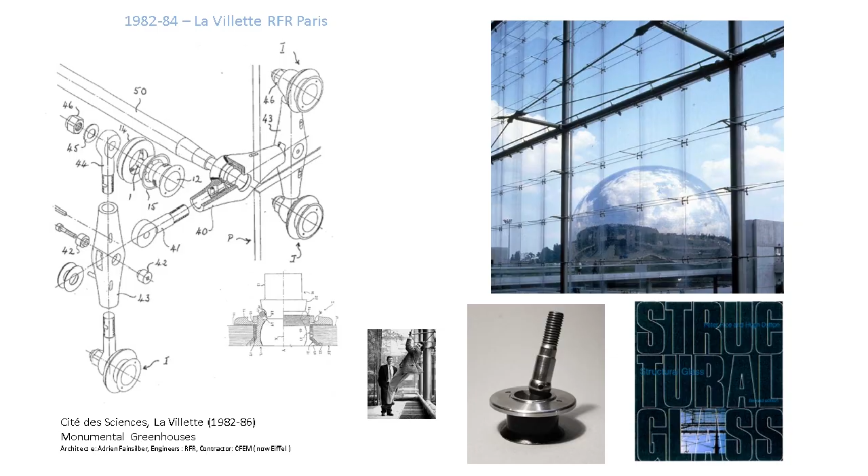There was Henry Bardsley, also an engineer. Peter used to call me the optimist, Henry the pessimist. He'd bounce questions off me and off him, and it was a very fruitful time. We ended up redefining the use of glass in facades using structural glass, and Peter gave me the honor of writing the book Structural Glass with him. You can see these images of the patents that we took out as RFR for developing this new suspended structural glass.

For me, my role was drawing, and drawing is really, really important. For me, it's the whole process. It's been part of my career and my life throughout - drawing that's so important.

I did these drawings of the pieces from La Villette by hand at the time. We didn't have computers, we didn't have AutoCAD to draw them for us or to correct them. If you made a mistake, you had to start again. This drawing, I think I did maybe 5 or 6 times.

But it was interesting - the context for La Villette was exactly as Peter had intended, a real laboratory of a mixture of professions. We consulted people, with Martin Francis and Ian Ritchie's incentive to go and visit Le Bourget Air Show, to visit glass factories, to visit boat manufacturers who made cables.

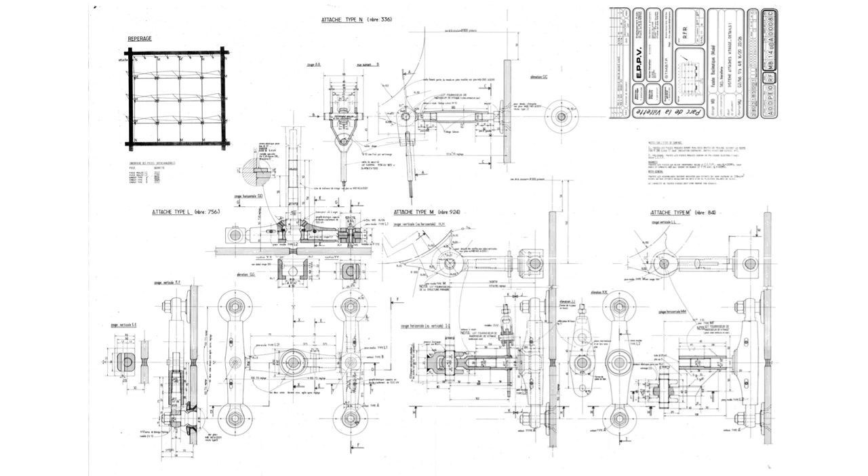And so I was sort of brought up in this technology of boat bits, which reminded me of my own background of sailing in Jamaica at the time with my father. So I felt very close to it. And I was learning - I was very, very, very lucky.

After La Villette, I went through a period where I spent a year sort of traveling between London and Paris. I had a French girlfriend at the time, which is why I ended up staying here. But I used to share my time between Paris and London, and it allowed me to work.

I went to work with Foster on the Stansted Airport, and I did a lot of the details of the tree structure, a lot of work on the facades, as well as reconnecting with Zaha Hadid and Bernard Tschumi, who were teachers at the AA when I was there.

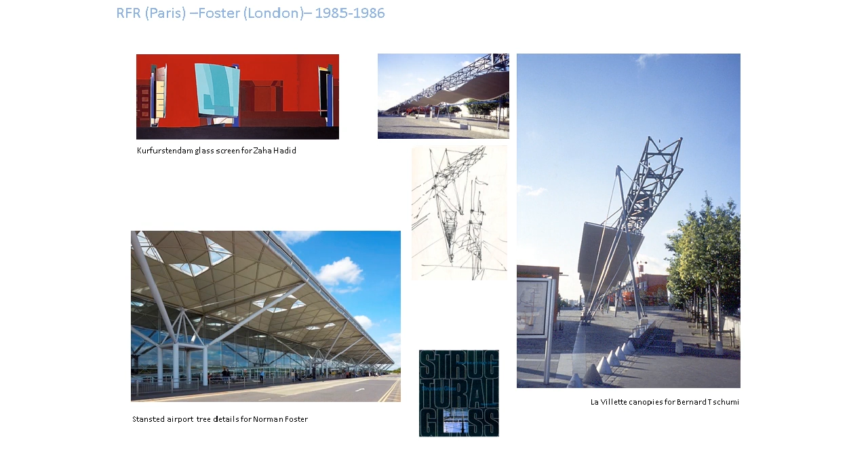We did a competition, the Kurfürstendamm competition, with Zaha, who also sadly, as you know, passed away not so long ago. And with Bernard, I ended up working quite a lot on his galleries for the La Villette Park. So this was flitting back and forth.

And then I decided to get married to my girlfriend, so I decided to come back to Paris and work with Peter. It was during that year in London, actually, that Peter's office was at Fitzroy Square.

I was working at Foster's, and in the evenings we'd just go and chat and talk about the book that he wanted me to write with him on structural glass, but also just on what we could do in architecture, what our approach would be as designers, mixing architecture, mixing structure, and designing holistic pieces.

So he invited me to come back, and the first projects we were doing were the nuages, as they call them - the cloud structure in the Tête Défense. But then following that, the pyramids.

I won't go through all of the work we did at RFR at the time, but it's quite remarkable work, I'm sure many of you know it. But again, it's exactly that - it was value-added pieces for designs where there's a fusion of architecture and engineering.

The inverted pyramid by Pei at the Louvre was one of the key pieces, and I think one of the most remarkable pieces of how natural light transforms this underground space. It's absolutely a brilliant piece of work, and I've always admired it.

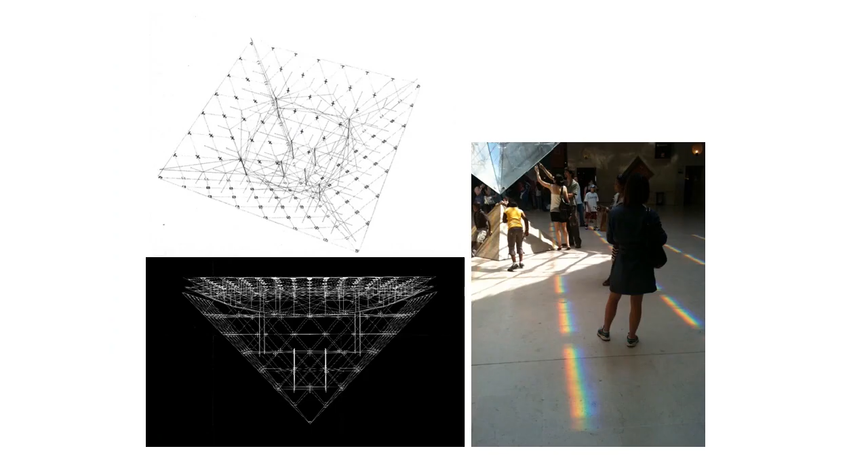The way the sloping glass reflects the sky down into the corridors on either side - the assemblies are very minimal. This was a project that Peter himself was very, very much involved with. If there's one of the projects I really think was entirely Peter, and Peter's thinking, it was this one.

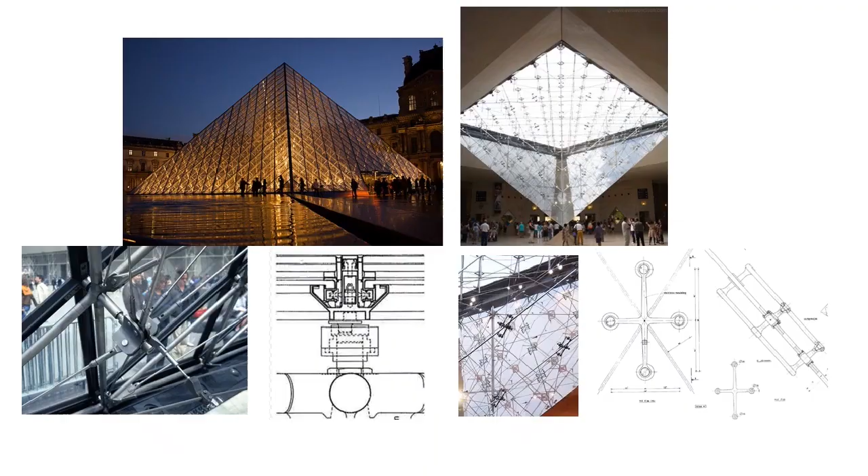So many times he sketched this idea of the tensegrity, making a tensegrity sort of net of cables that suspended the perfect planes of the four sides of glass that are hung down. There's no structure except for this tensegrity mesh that maintains the plane of glass in its inner surface.

I've found this, and I use this example often with students. The difference, if you look closely, between the right-way-up pyramid, the Grand Pyramid, and the inverted pyramid - it shows two very different approaches to design and engineering, which for me reflect quite well the approach that Peter Rice had and that we were taught at RFR.

So the Grand Pyramid is a layered design. It's quite clear - there's a steel structure, the tubes, with the bracing that stabilizes it. That was the engineer's job - that was Nicolet from Montreal who did the engineering. And then Pei had his team in New York do the facade design.

I think his name was Mike Flynn. I'm not entirely sure, but they brought in the most advanced system of glazing at the time, structural glazing. This was right at the beginning when glass was bonded to an aluminium structure.

You have the tube, about 40 or 60 millimeters in diameter, I forget. You have some adjustment patches because the structure has to adjust to make sure that when the glazing comes on, it fits. Two distinct disciplines, two distinct responsibilities, which creates a global design where, in fact, the glazing system ends up being bigger than the tube itself.

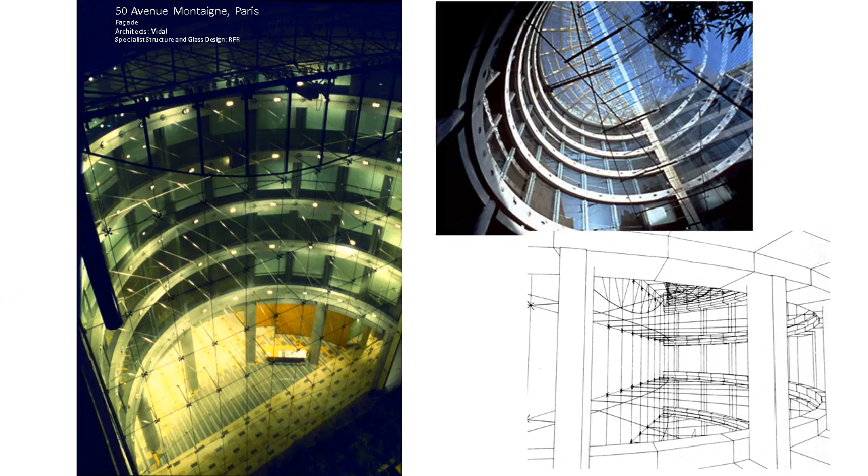So it's a good example for me of the difference of this approach to holistic design that Peter taught me. And then since that, at RFR, we carried on doing this work using structural glass.

This facade, and I can say it's quite remarkable today - it's 24 meters high, 16 meters wide, one curtain of suspended glass, each pane suspended from above, braced only with cables. I'm showing it today because it's very, very sad.

This building, this facade, was pulled down recently by French architects to redo the 50 Avenue Montaigne, and nothing was saved. We tried to get it listed or retained with the client representative at the time. We tried to get people interested, but sadly, the only memory we have of this project is these pictures, and it's very, very sad.

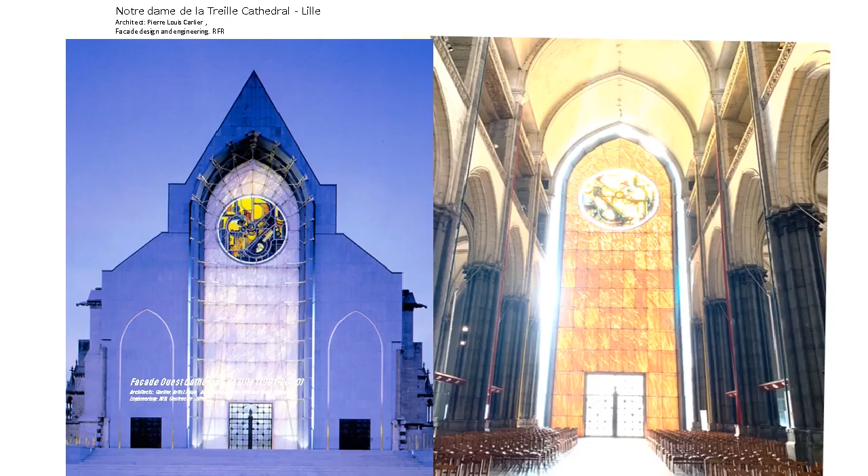The last project I worked on with Peter was the cathedral in Lille. When Peter fell ill in '91, he decided to stay in London and work from there.

I would travel over, along with other team members of RFR, to work with Peter at his home. This was a project that really got his attention and full interest, as he was also writing his book, An Engineer Imagines, at the same time. It was a very spiritual project for him - it allowed him to get closer to the church, and again, it was another remarkable opportunity for me.

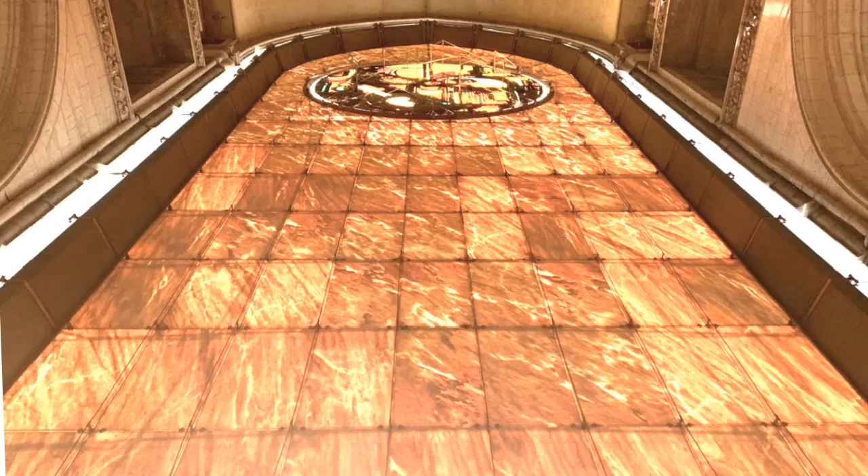The idea was to create, in an existing cathedral, this window in suspended stone, fitted into the end of the cathedral.

So now in Paris, after RFR and after Peter's untimely death, I decided to start my own practice in Paris, in Rue Pecquay. This is a picture of our studio - it's right next to the Pompidou Center, which is quite significant for me, in the heart of Paris.

We're very lucky to have a skylight, and there are 15 of us - keen, creative, inquisitive engineers and architects, a lot of students, very young people, and a very motivated team. We're working on projects in Paris, but very largely a lot in China, a lot in Hong Kong.

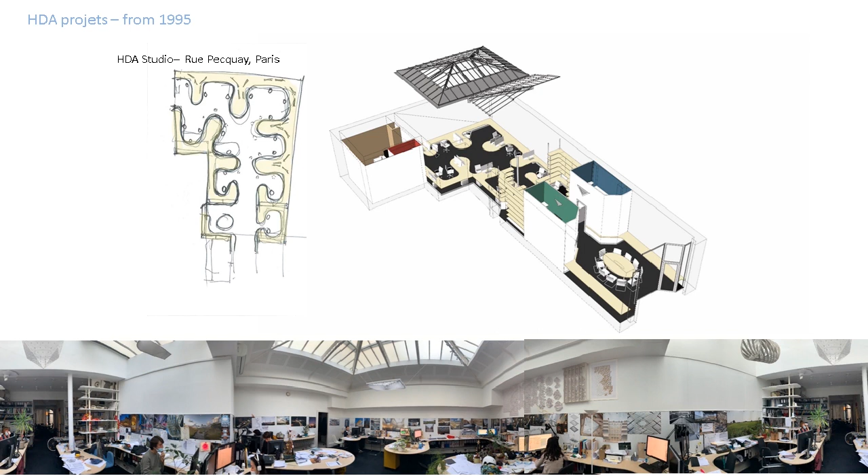I'll just go through, not to keep you too late - I'll show you a couple of our projects done here at HDA in Paris. I worked a lot with Bernard Tschumi. We shared the space at the beginning with him, and one of the projects he asked me to work on with him was another way of looking at glass.

It was for the Acropolis Museum in Athens, where the museum that Bernard won the competition for was to house the Elgin Marbles. The Greeks, Bernard, and myself felt that they should be in Athens.

The idea was that the museum, the Parthenon Gallery, is exactly the same proportion as the Parthenon itself, raised up and elevated on top of the museum, so it gets full protection and you get the view of Athens. You can be in Athens with the same orientation, the same light, so symbolically it's quite a strong idea.

So here we use glass very minimally. I used two skins of glass to create a sort of thermal chimney, because it's not only a very rich cultural context, but the climatic context of the heat of Athens was a real issue.

How do you create a glass box in Athens? We created a double skin with a chimney effect between the two skins, but only for the upper pieces of glass. The lower piece of glass was just a single piece with no framing, at eye level height, so you could get a clear view of Athens, and the hot air goes up. And I have to say, it does work. So it's a facade design looking to nature, looking to understand the climate and particularities of the climate of Athens.

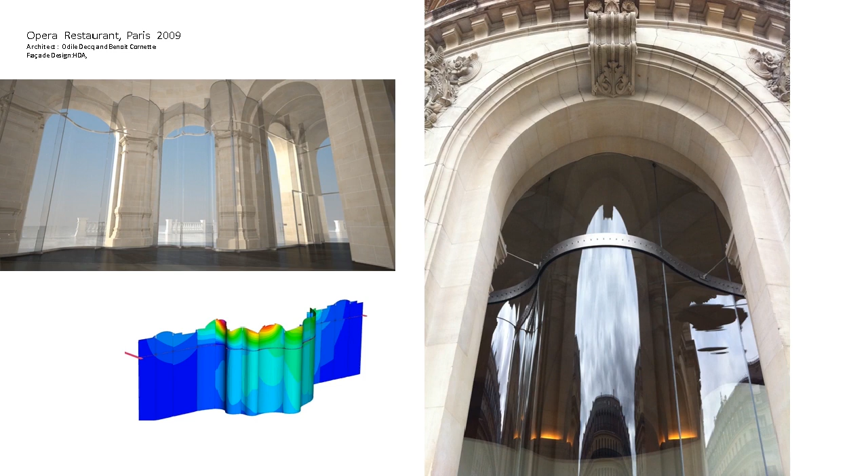Another one with Odile Decq here in Paris. We helped her do this very small restaurant in the Opera building, using curved glass this time. So instead of using mullions, we curved the glass. This process is used quite a lot. This is one of the very early ones where, just by using finite modeling, we can simulate the structural performance of the glass without mullions. So you get a mullion-free rippled glass where the ripples follow the forms of the arches of the initial Garnier portico.

And then some bridges. Peter loved doing bridges. He kept saying to me, 'I'd really like to do more footbridges,' because footbridges are something where you can't hide the structure. The structure is obliged to be part of the architecture. You're designing the architecture with structural components, so every piece has to function as well as be part of an aesthetic composition.

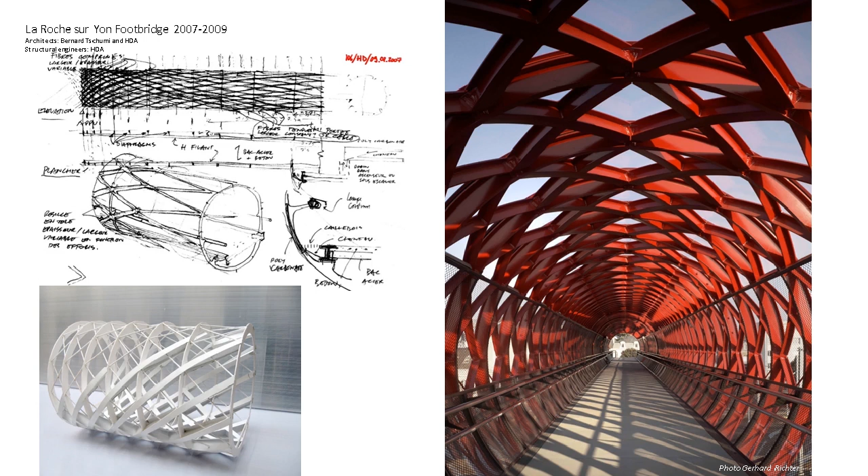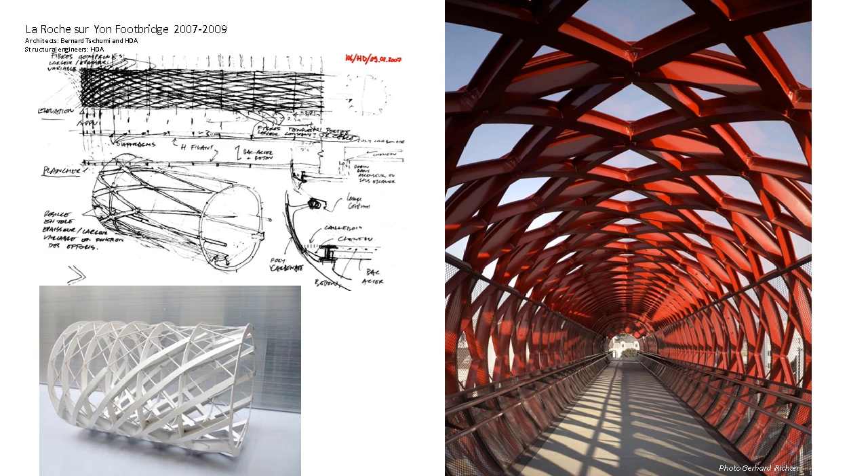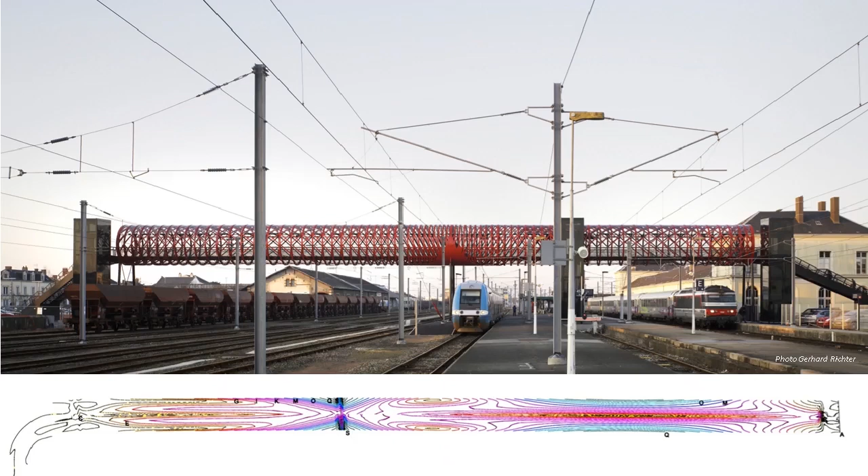Another one with Bernard Tschumi again, in La Roche-sur-Yon, a railway bridge over the railway tracks of the SNCF. The line was upgraded to take TGV trains, and the bridge over the railways has to have a mesh, or covered protective panels, to stop people throwing things on the tracks and to make sure the safety of people and trains is maintained. So we decided to do the bridge as a mesh itself, enjoying the idea of looking at how a mesh is working structurally.

So we designed a tube, looked at how the forces would go in it, and then adapted the shape of the structure to follow the forces within it. It's just a simple tube for a simple railway track in a small town in France. We're just enjoying the structure, the structural forces—the design, the way it goes together, is expressed in the design and becomes an interest in itself.

Another project we've completed fairly recently is in the Louvre itself again. I was very honored to come back and work in the Louvre after working on the pyramids, particularly the upside-down pyramid. Peter Rice also helped on the Cour des Finances, the skylights, Marly, and the other courtyards, which he worked on with Ian Ritchie. This final courtyard is the last piece of the Louvre.

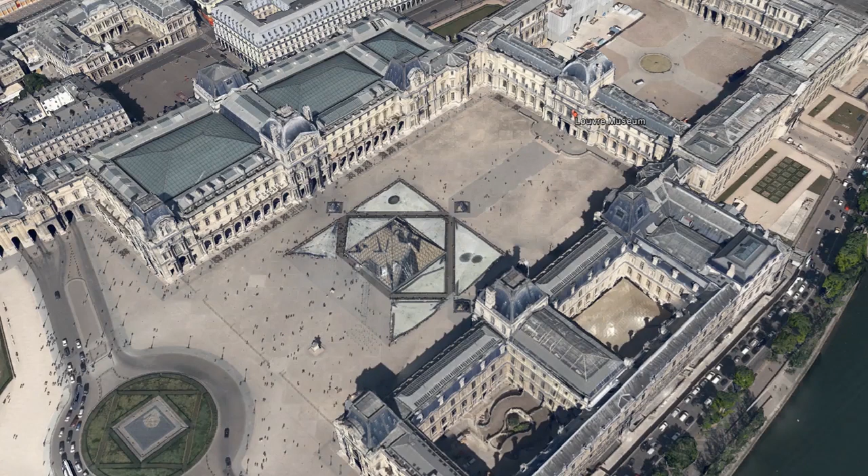I was asked by architects Rudy Ricciotti and Mario Bellini to help them on the technical design of the Arts de l'Islam department exhibition space. It's the last part of the Louvre to be converted in the Grand Louvre project. Rudy and Mario's idea was to have a very minimal wavy surface, evocative of sand dunes or a flying carpet—bold and very modern inside the Louvre, yet very appropriate.

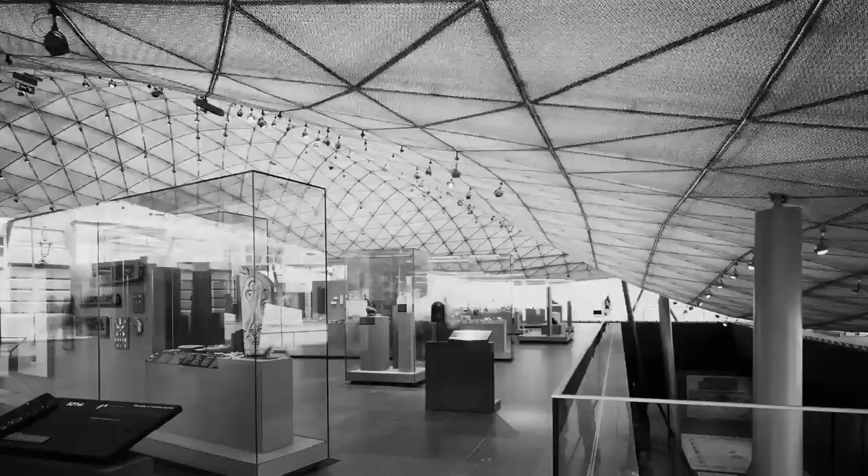And for the scale of it, we decided not to have visible glass, but we obviously wanted the light, so the covering over the Louvre is made of meshes which filter the light. These are some views inside—some beautiful photographs by Erieta Attali show the idea of the soft light.

Here we wanted the structure to play a very minimal role; it's much more about just filtering light. This concept sketch I did shows how we contributed to the design with Rudy and Mario by making the wave look very thin on the edge, so the structure tapers to a point, but it's deep only where you need it, where the maximum bending moments are. So here, integrating the structural thinking into the architectural design, trying to get the feeling of a thin carpet flying, but using an optimum amount of steel and getting the impression of lightness.

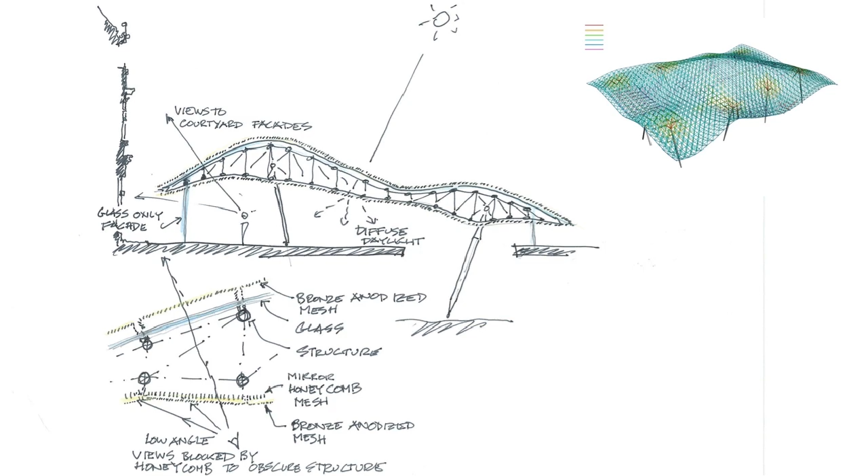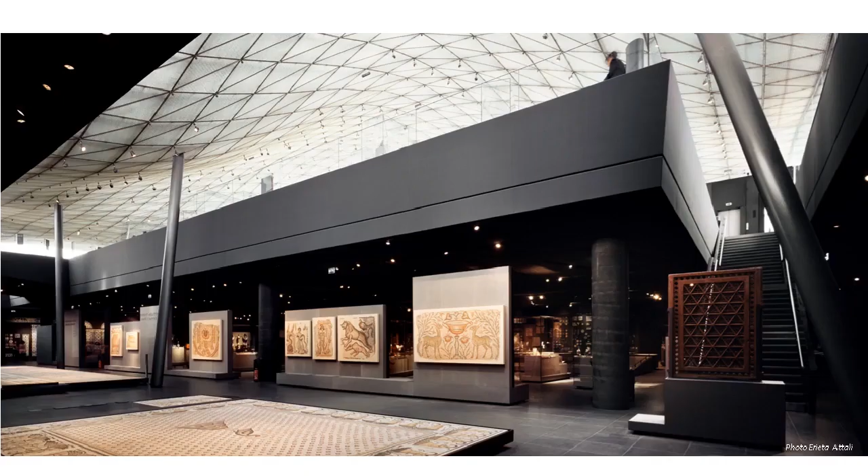So, and here's some other pictures. This shows the mesh on the top that we use to hide the glass, to filter the daylight, to limit the amount of direct sun. Obviously, you cannot have direct sun on works of art, but we still want to have the light to be able to see the artwork. There's the cleaning process, and then some other views inside.

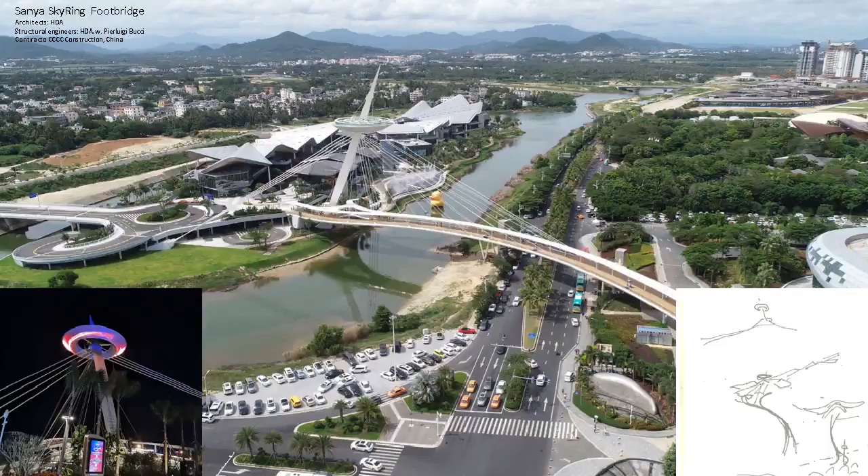And we played with this idea of inclining the columns. We could have done them straight, but we suggested to Rudy that, hey, it'd be more fun if they were inclined, like the poles in the Bedouin tent. And it also reinforces the idea of the roof floating and being a lightweight object.

Then another footbridge that I've just completed in Sanya in China. This one I worked on with a friend engineer, Pierluigi Bucci, and a Chinese construction company, the same company that built the bridge between Macau and Zhuhai and Hong Kong. Massive company. And the client just said, we just got to build this bridge.

So it happened in an incredibly short period of time. In 1 year, the whole thing was completed, but very well. And we've all been taught to be cautious about some of the designs in China, but this one, I have to say, was just remarkable. The quality of the construction is quite remarkable.

It's a sky ring. Sanya is the southernmost part of China. There's a long beach and lots of hotels, but there's two shopping developments, one on the island and another one just to the right. And the bridge was to create an iconic connection between these two shopping retail developments.

And we won the competition with the idea of creating a sky ring where people could go up on a lift to this platform. I was obviously inspired by the project in Brighton, that remarkable disc that's up there, and I think that here you can get a view of the sea from the top.

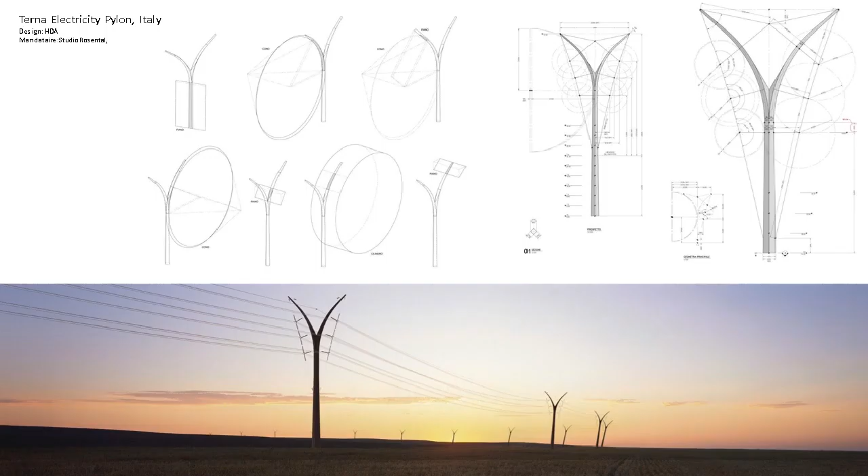The pylons dominate the landscape. I used to call them industrial soldiers marching across the landscape. They're insensitive. They're very practical. They're very functional. They're very economical. But they are hated, and people don't like the electricity pylons. So in the two competitions we did, the attempt was to try and improve the impact of the electricity pylons, the transport of electricity in the landscape.

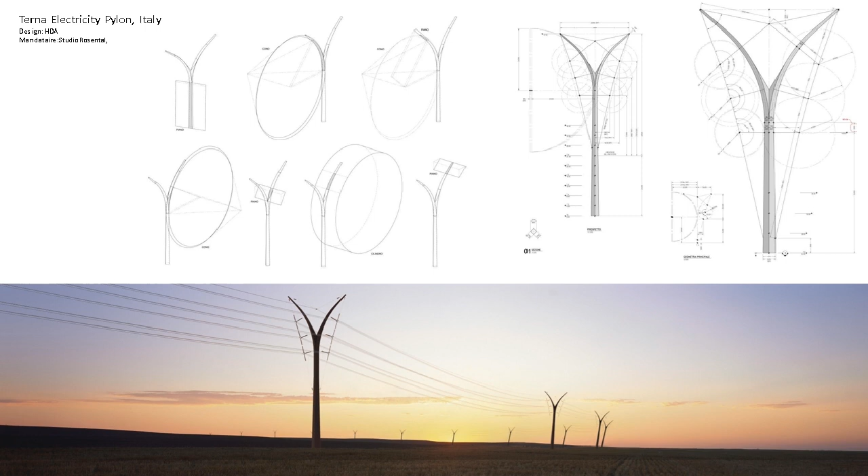This is the Terna competition in Italy that we won. We literally just took a sort of leaf-shaped pylon, changing the shape of the pylon. We were very naive, not knowing how the pylons were suspended and how the cables worked. We just thought it'd be nice to use the idea of tensegrity and fix the cables to a network of other cables, so that the only image you saw in silhouette was this very delicate leaf-shaped object. And I was happy to say we won it.

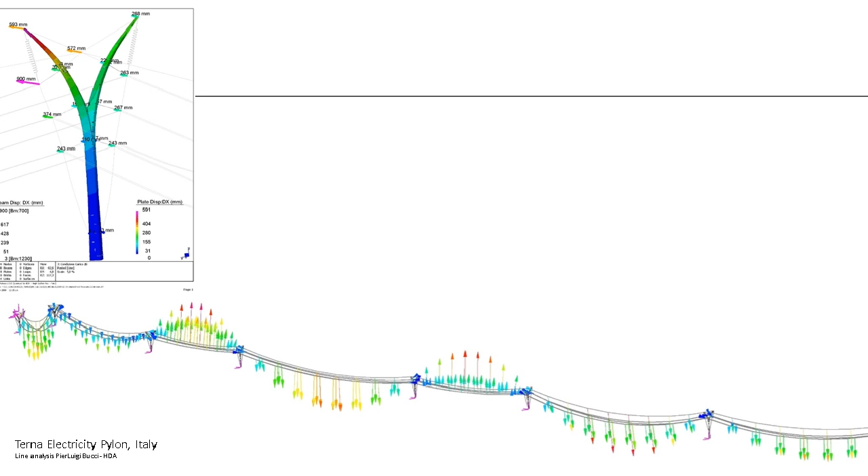And the same friend, engineer Pierluigi Bucci, attacked the project by building a computer model of the whole line, including the pylons and the cables, looking at them in different cases. But when we went to talk to Terna, they said, no, we have a table of where the suspension pylons are that take the gravity loads, and where the tension pylons are that also take the tension loads. But this approach was completely foreign to them.

We won the competition. We tested it. We broke the rig, not the pylon, when we did the testing, and so it was successful. And there's a line somewhere between Milan and Rome on the highway. You can see our pylons. They are here in the background.

The idea was also, in Italy, you get this beautiful light, and the triangular sections of the profiles pick up the light beautifully. So there was the symbolism in the design, sort of reminding ourselves of nature, and how the design can be inspired by nature.

Then we got invited to do a second competition after the one in Italy, for a line for RTE between Lille and Valenciennes. This is the landscape there. It's very flat, punctuated by church steeples. And so we had a different approach in this project. The client wanted a specific line, not something generic that you could use everywhere, just for one line, one design. And so with our experience from Terna, we tried to think about how the lines could work.

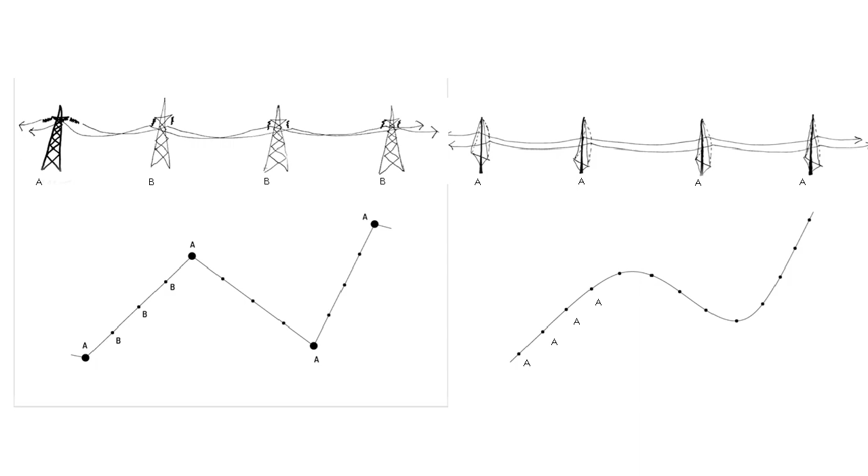But in fact, with the process of the selection, RTE were very bold in their approach. The competition was not decided by RTE. It was decided by a local group, a participative consultation with all of the local interest groups in the area between Lille and Valenciennes. So we had to go and present the design in a sort of town hall in the middle of the place where the line was going to go through, and present it to the farmers committee, the hunters, the local residents, and it was very, very argumentative.

Obviously, as nice as you want to make the pylon, people still had a really hard time accepting this idea of having the pylons. But it was a very interesting process, and it was for me very revealing, because it meant sharing the idea that we can make things better if we design them carefully.

So we put a lot of attention into the little maintenance platforms, how they reflect the light, how all the connections were made to be as minimal as possible, and just the idea of a pylon: it's a very tall pylon, it's very bold, and it's proud to be tall. We're not trying to pretend it's not there. It's there. We need electricity. We just want to design them and try and make them beautiful objects to make them more acceptable.

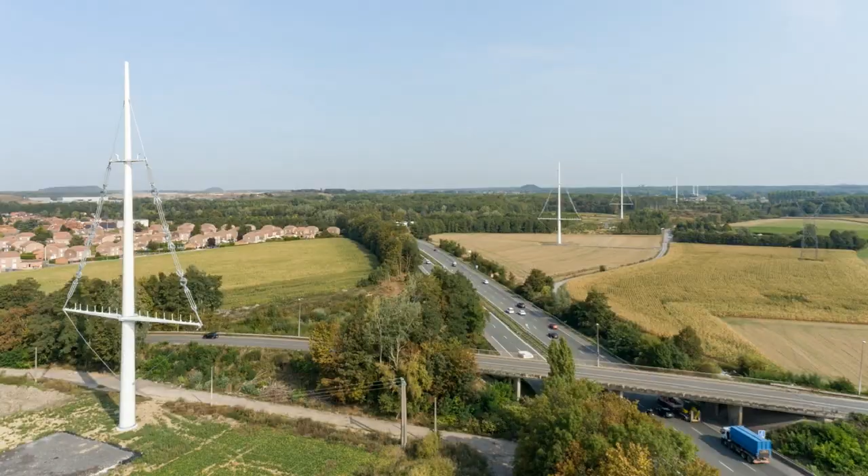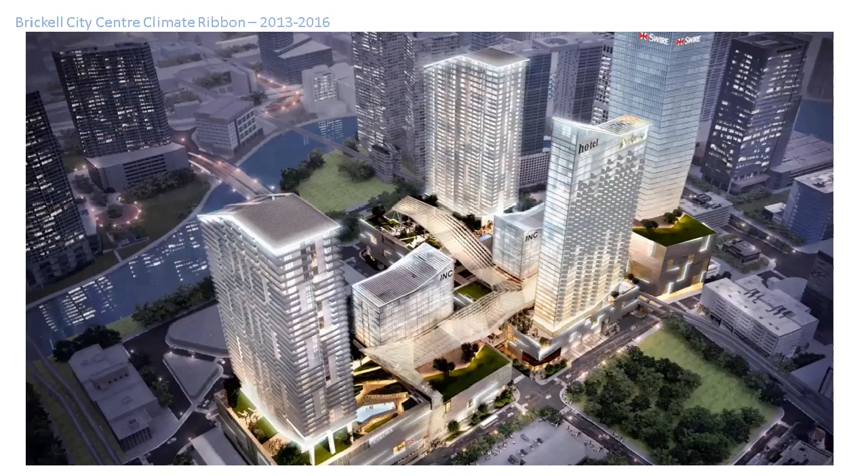So, changing subject slightly. This next project I wanted to talk to you about in designing with nature is in Miami. It happens that for about 15, 20 years I've been working with Swire Properties in Hong Kong. I've developed a very good working relationship with Swire.

I've done many projects with them in Hong Kong and mainland China, curiously in a similar way to the conversations we'd had with Peter about us doing parts of the building, doing just the pyramid in the Louvre, or just the greenhouses at La Villette, doing pieces of buildings, but doing them as part sculpture, part architecture, part key value-added piece.

And we'd have conversations with the chairman, Keith Kerr of Swire at the time. He was going to build this big tower in Hong Kong, and I said, well, spend all the money on the lobby. People come to the lobby, they see the lobby, that's where they touch it, and you can be more economical with the facade. It's the same conversations I'd had with Peter, but here it was with the developer, and this culture, this idea went, and I've done about 10 projects with Swire doing a similar thing.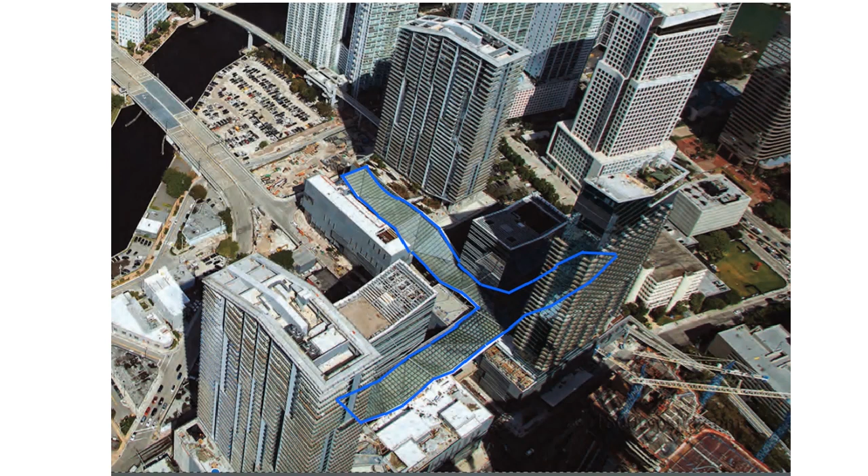So they couldn't air condition it. They couldn't close in the volumes over the streets anyway. So they decided to say, okay, we're going to make an open street in Miami, but what we need to do is to make it a sort of pedestrian street that's comfortable. So Steve Owens, the president of Swire in Miami, asked me to do the climate ribbon. And this brought me home.

These are some fun pictures of my childhood. Peter mentioned I grew up in Jamaica. There's me, age 8, and there's me again in the same place 40 plus years later, 50 odd years later. I grew up in this house with breezes; the houses are built on top of the hills in Jamaica. Catch the breeze, shade. It's all about shade and breeze. So this is what design was about. This is what making life comfortable in Jamaica was about.

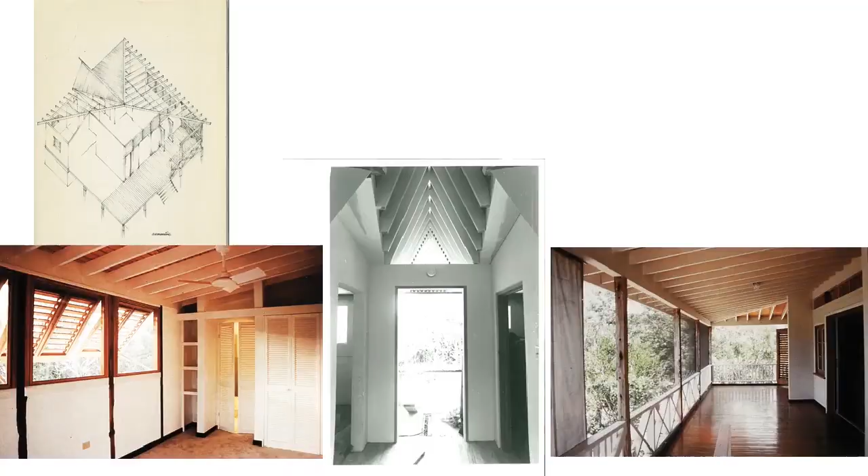And I went back to the house a few years ago, and it's gone. Nature's taken over. So nature's won that battle. But it was very much a part of me. So coming back to this context was very strong for me. This was my first house I did as a student, using wood, and there was no glass. Interesting, I ended up being kind of known for using a bit of glass. But all the windows were just louvres, wattle and daub, mosquito screen, naturally ventilated, no air conditioning.

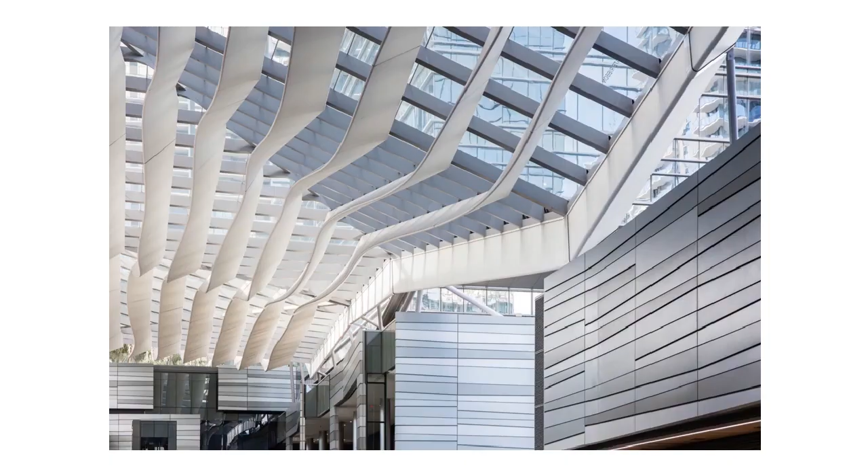So doing the project in Miami was a similar thing, obviously on a different scale, but with the benefit of the engineering and the technology that we have today. And I think it's quite interesting to take those simple intents of using nature's forces and bonding them together with the technology as a way forward. For me, this project in Miami is very symbolic and a very powerful statement about what we can do as designers, putting together common sense, attention to nature, to her forces, to her forms, with what we know about engineering and computers and the technologies we have today.

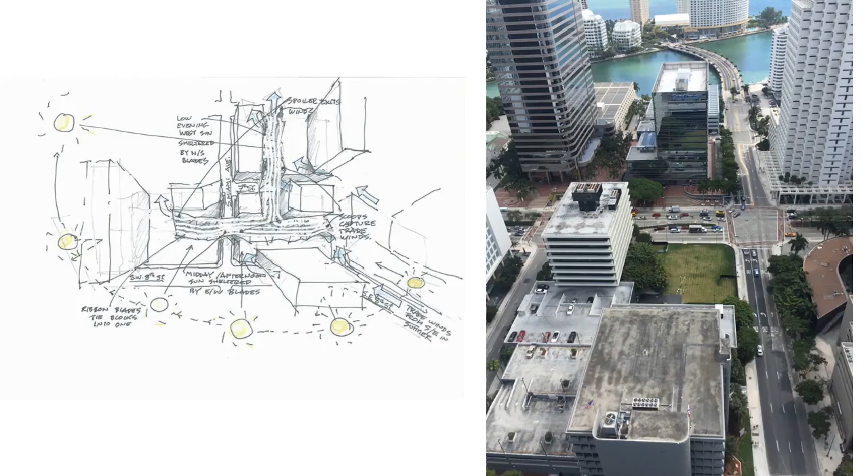This project, we did parametric modeling in the studio. For the sun, all of the blades, their shapes are determined exactly by the orientation of the sun. We wanted to have views of the buildings and of the Miami sky, and maximum daylight, but indirect. All these blades are designed in function of the buildings in the context of the development. They're all inclined very slightly to optimize getting shade only, and then views where we can see through. And then the other thing we did was to capture the breeze.

So this sketch here shows the development. We have this street, Southwest 8th Street, which goes down to the sea. Thanks to my youth in the Caribbean, I know that you have a trade wind from the southeast all the time, particularly in the hot seasons. So you get the breeze coming up Southwest 8th Street. We wanted to capture this breeze and funnel it through the whole development, but at the same time shade it from the sun. So the east-west blades on this portion protect from the sun from the south.

The hotel here protects this band from direct sun in the midday, but the blades, if they're running north-south, protect from the westerly sun. So this idea, a bit of common sense, and then mixing that with the science, we did these desktop simulations of how the wind would behave. We talked with RWDI, and RWDI confirmed the hypothesis we'd had, and advised us that we need scoops to catch the breeze, and spoilers to help it out.

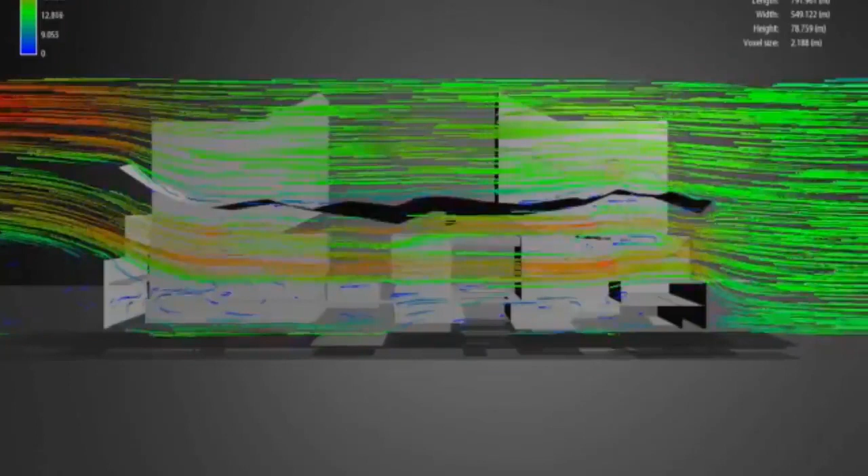As this diagram shows, you could see at the tail end of the breeze where it's red, that's a spoiler which lifts it up, creates a negative pressure, drawing the air through and making sure that you get nice breeze flow through the development.

We tested that in models in the RWDI lab, with a piece of cardboard to help us get an idea. So there's a bit of empirical design mixed with the science.

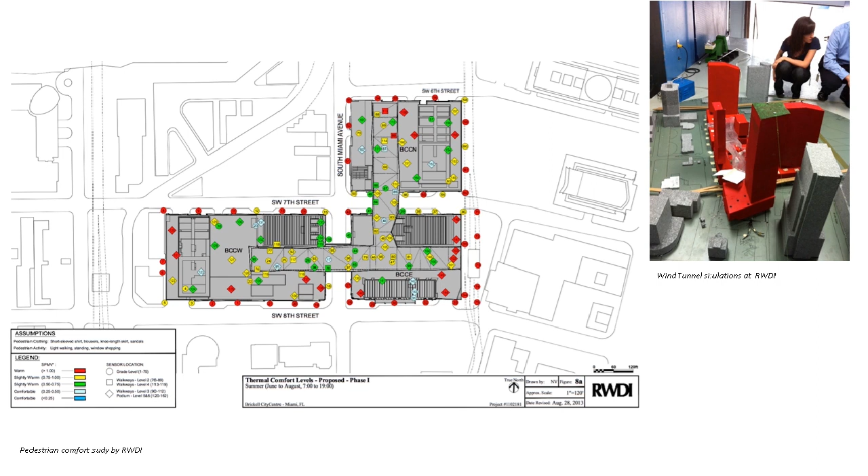Then they did the simulations of the comfort of the people. The red dots are people - this is a simulation of the summer comfort, based on statistical data from surveys of people in different conditions that they've built up. And so we could prove that, yes, we can create a microclimate in the development that's going to improve the conditions. And it does work, I have to say.

It's got a lot of success, and I had a very, very nice article in the Financial Times about it. It's been a success, this project.

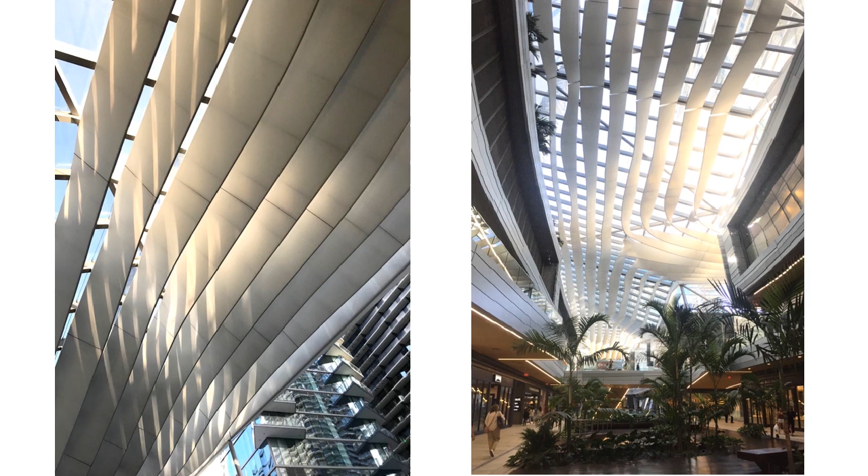As an architectural statement, as a statement about, listen, let's be careful about nature - a design that's obviously to do with light, with wind, with flowing, that inspires people to respect nature and also to make the space a nicer place to be. This is the same photograph taken at the same place at different times of the day.

It's just the way the light moves. It looks as though the roof is actually moving. It becomes a cloud in a way. So, and then some other views.

So it's become an icon for Swire, for their projects, and also as the developer, for them to be able to say, this is sustainable design. We care about sustainable design, and it's part of our DNA. Swire is very, very concerned about sustainable development, and this is a flagship for them.

And it survived the hurricane of Irma, which was a big test for us all - quite frightening when I saw the hurricane approaching. We're designed to filter nice breezes through, but when the big breeze comes like this, it's a whole different story.

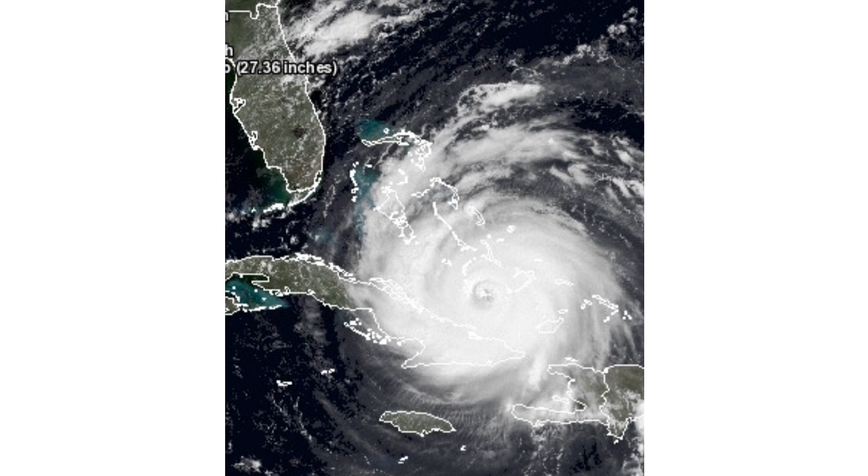Again, it was RWDI that did tests, wind tunnel tests, and the American engineers, MKA, together with Gartner, the constructing builder from Germany, all pulled their forces together to make the design able to withstand the hurricane.

Just as a small little piece here, following the design, I went back to Jamaica. A friend of mine asked to work together with him designing the Parliament. Sadly, we lost the competition, but just as a little aside, we made this design

of these shells in a park in Kingston, based on similar ideas to Miami, where we catch breeze, create a chimney, a natural chimney that allows natural ventilation of the building. We are obviously inspired by Felix Candela's beautiful shells. We felt that concrete was very appropriate for Jamaica.

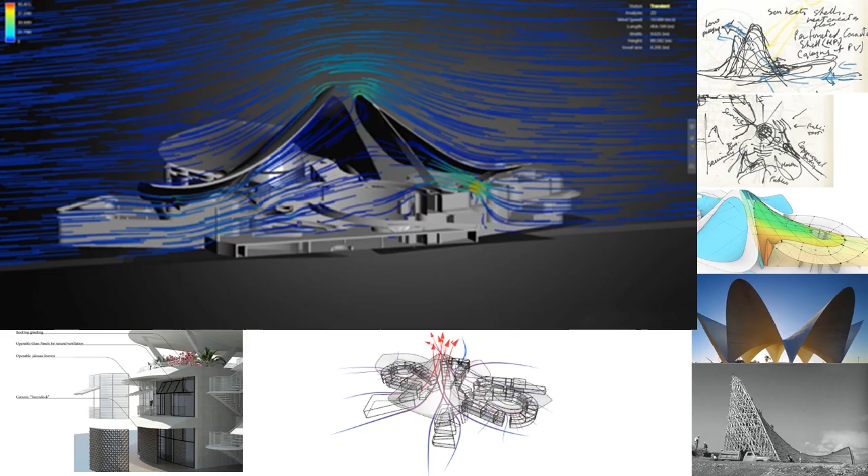And anyway, very sad, we lost. But I still like very much the design. We could be entirely naturally ventilated and cooled, just with the natural breezes from Kingston Harbour.

Then back in Paris, this last sort of 2 years, I've been working on this monument for the Hôtel de la Marine. If you know the Place de la Concorde, there's two identical buildings designed by the architect Gabriel at the end of the 18th century for the king. And sadly, this is where they were executed in the Place.

But the building housed the navy - that's why it's called Hôtel de la Marine. It's not a hotel, it's the French term for a grand building, and it was basically the grand building that houses the marine. The opposite one on the west side of the square is a hotel, the Hotel Crillon, and the automobile club is also there.

But this one was changing function from being the Navy headquarters and offices for several hundred years to become a public space, coming back closer to its original use, which was to be a garde-meuble du roi. It sounds like the king's furniture storage, but it's actually where the royal furniture would be put on show, similar to how furniture is shown in an exhibition today, at Milan or wherever, where the top design is put on show for people to know what the king's tastes were, and to sort of sell French furniture taste.

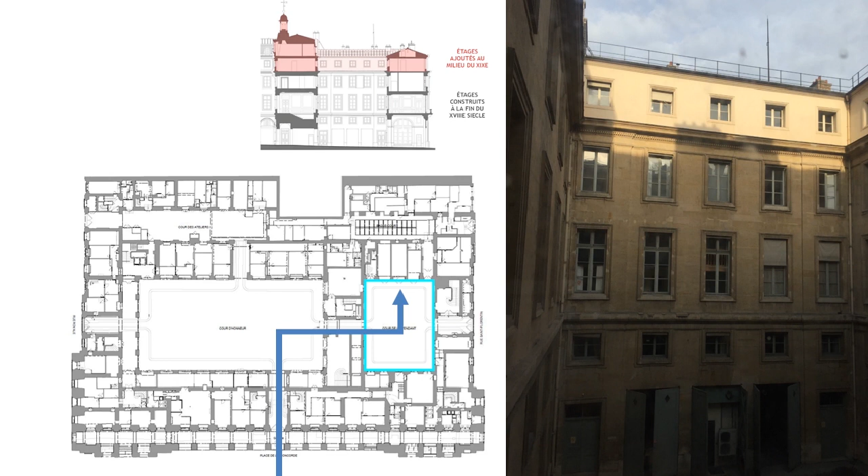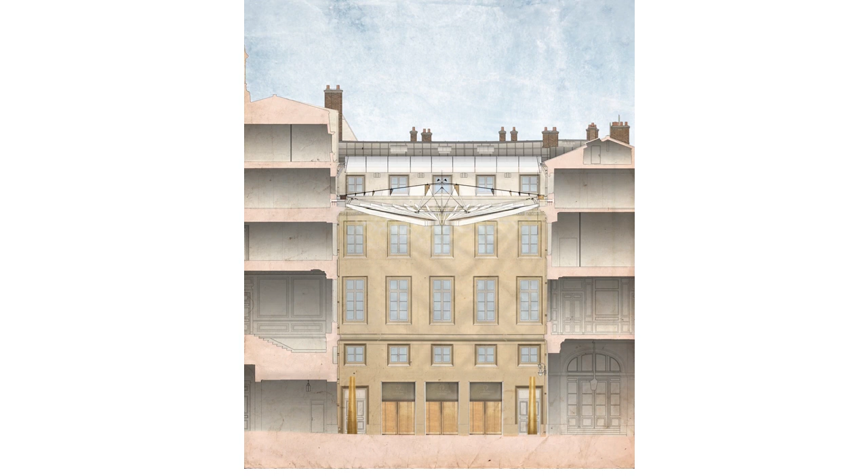This shows how we positioned the skylight at the cornice level to hide the upper floors. But you'll see these grey panels here, they're actually mirrors. So what we decided to do is use the upper floors as a support for mirrors, and the structure itself is used to reflect and bounce light down inside.

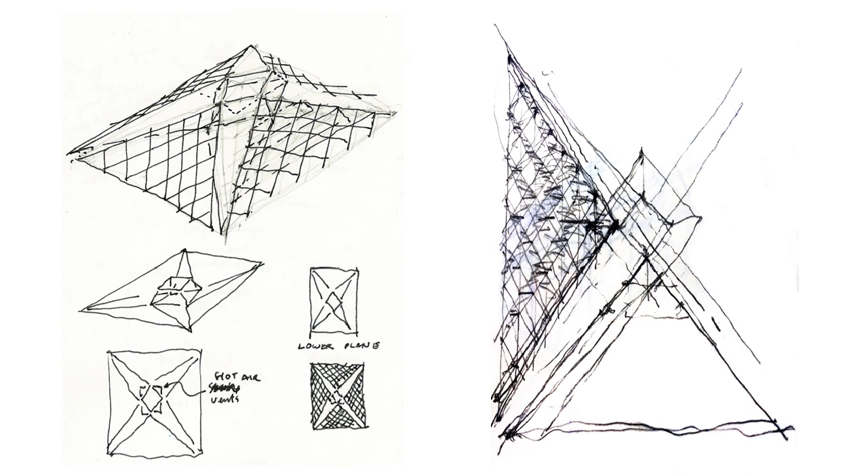Christophe said, you know, the Pantheon is a wonderful roof with a big hole in the middle. So he inspired me to think that maybe the roof can be like a pyramid opening, where the opening portions are just open to the sky and let the light in.

And then, just in thinking about the project, wandering around, even in the metro, reflected light can sometimes just transform a space, animating it, bringing energy, bringing light, and bringing joy. So this was our idea, inspired also by jewelry, how jewelry reflects light and scatters the rays around.

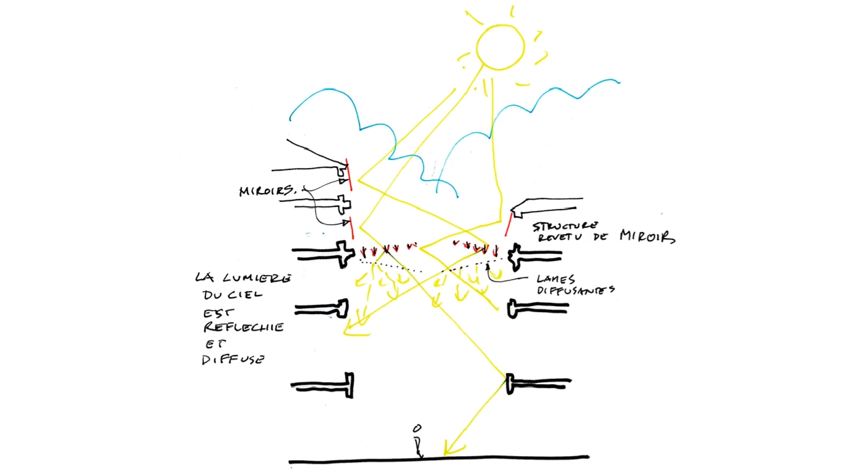This diagram shows how we did it. The red lines on the upper floors are mirrors. All of the structure is clad in mirrored stainless steel, to grab as much light as we could and bounce it down inside the space.

Here's the detail of the mirrors and the shape of the structure, which is fixed to a perimeter frame, then positioned on top of the cornice with anchors going into the walls of the existing building.

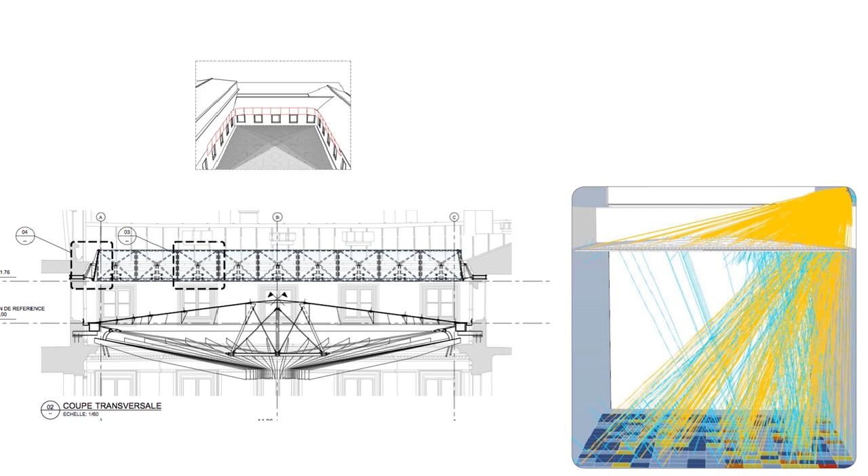We did these desktop simulations ourselves of how the light would be bounced around inside. This is the idea of this kind of glazing framing that we used.

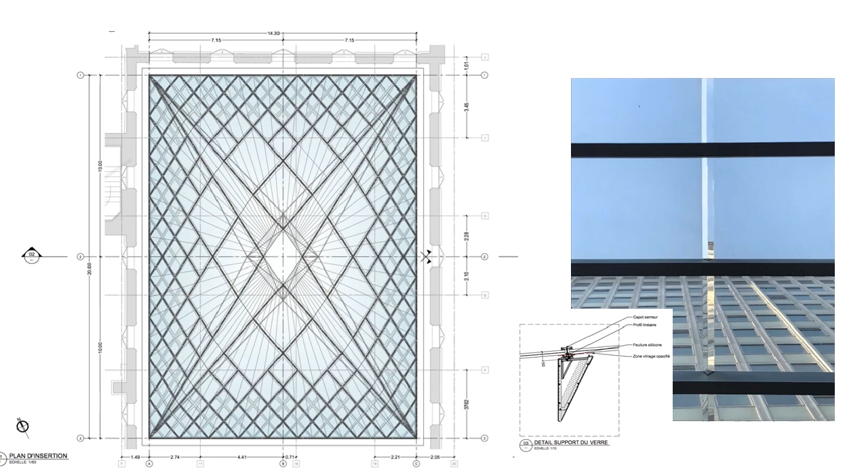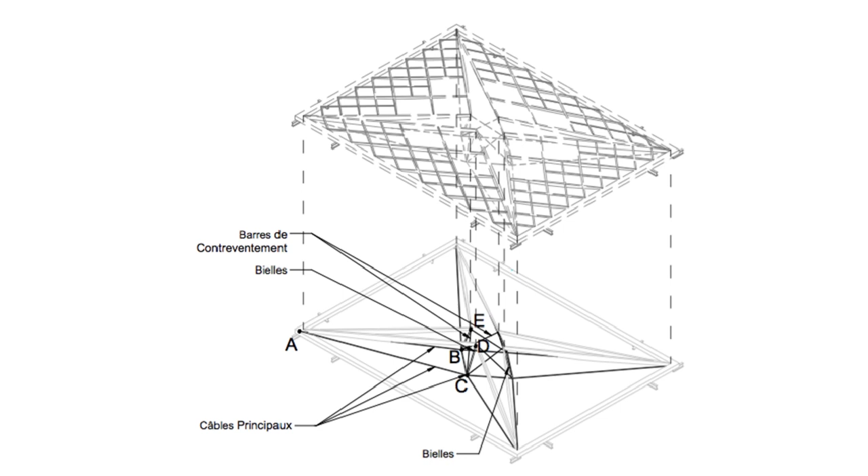On the left is the plan showing the geometry, like a jewel, of the fragmentation of the glass. And then how we support the roof in 4 different triangular sections, lifted up by a series of props on cables, to get this feeling of the roof opening to the sky.

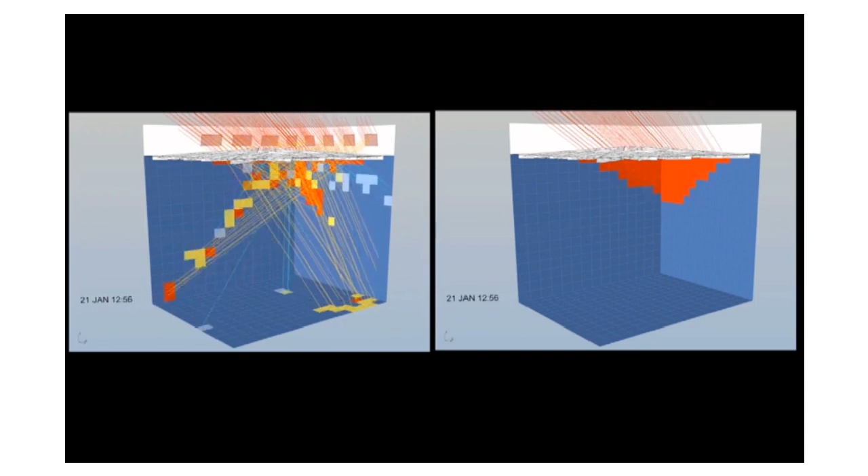This is a little simulation showing the daylight you get in the courtyard before the roof, and on the left is the light you get scattered around by the mirrors. So this composition of the mirrors on the upper floor and on our structure reflects and bounces the light around inside.

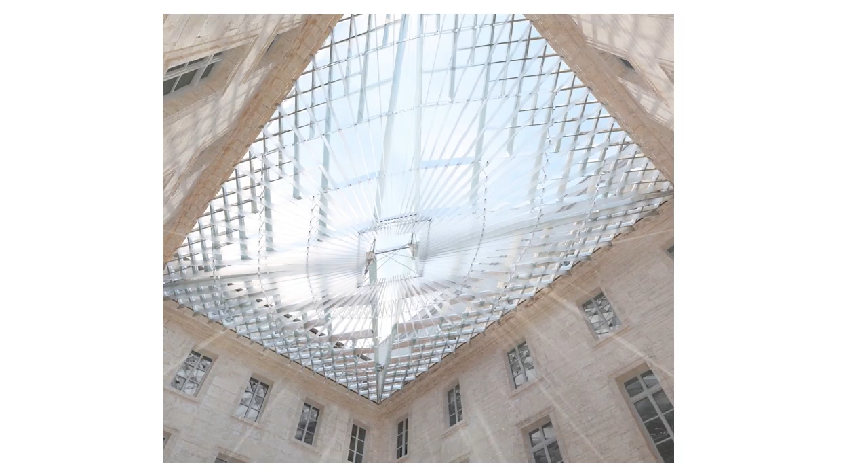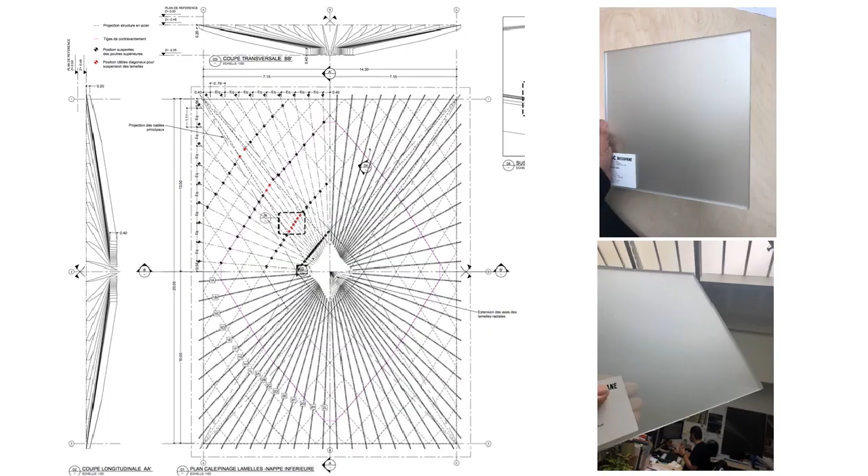This was a perspective we did at the time to convince the client to show what we were going to achieve. You can see how, by making the structure much denser around the perimeter, we also mask the upper floors—those added later on—so they're not in your consciousness anymore when you're beneath.

Some other pictures of our drawings. We did a lot of work on the glass, reflective surfaces, acid etching to get the right levels of reflectivity using low iron glass. More drawings—as I said at La Villette in the beginning, they're so important. The drawings tell the story of the piece of work.

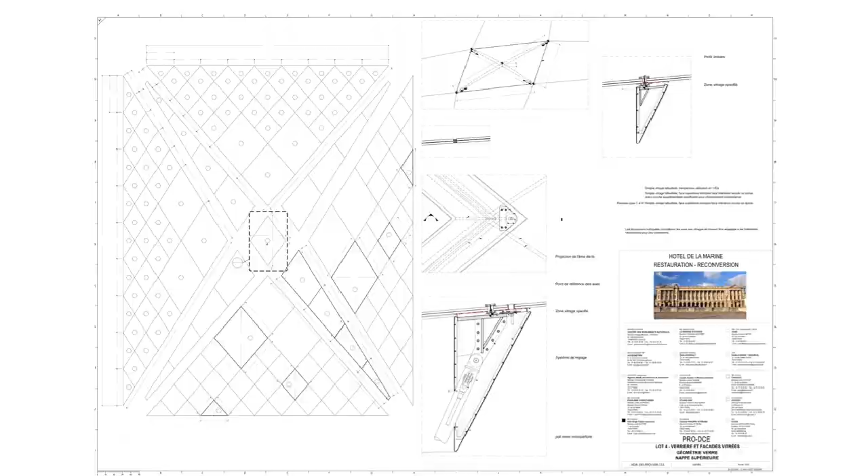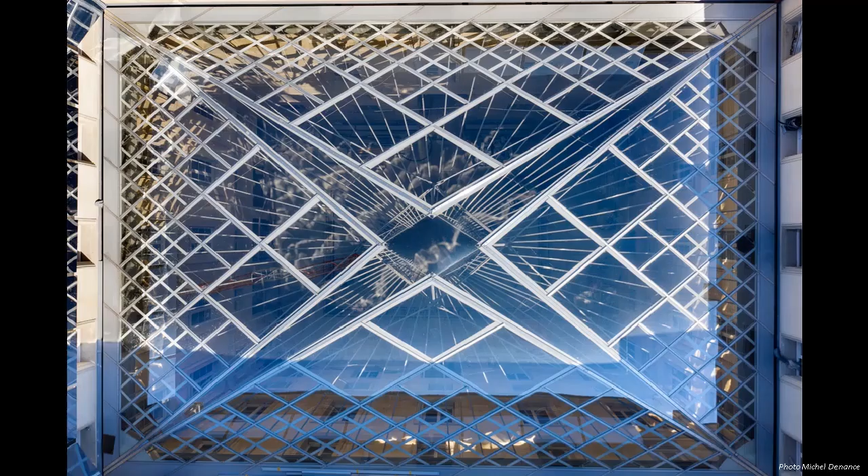I'll just flick through these quickly. These are the contractor's drawings, from Eiffage Metal, who won the contract. Curiously, they're the same people with whom I worked to do the greenhouses at La Villette about 30 odd years ago.

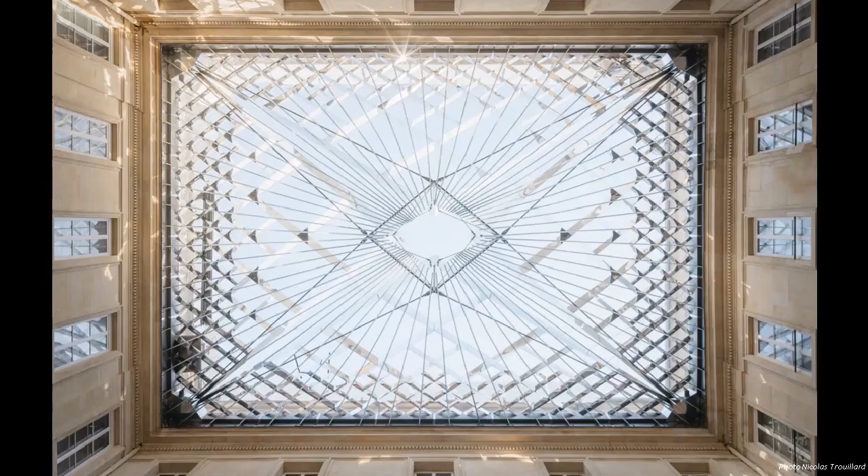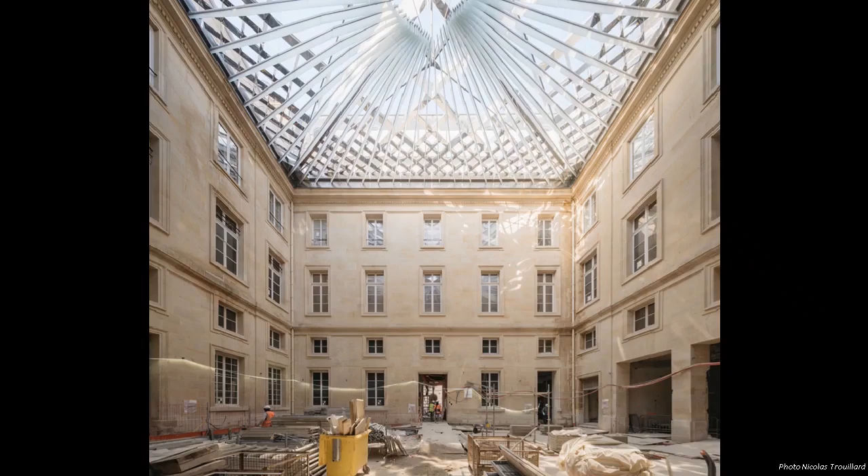And some photographs, a view from above. These beautiful photographs by Nicolas Trouillard show how the skylight opens, and then the same view from beneath, showing how the mullions and the roof framing just literally disappear and become like a cut diamond, giving this idea of the opening in the middle and the fanning out of the light.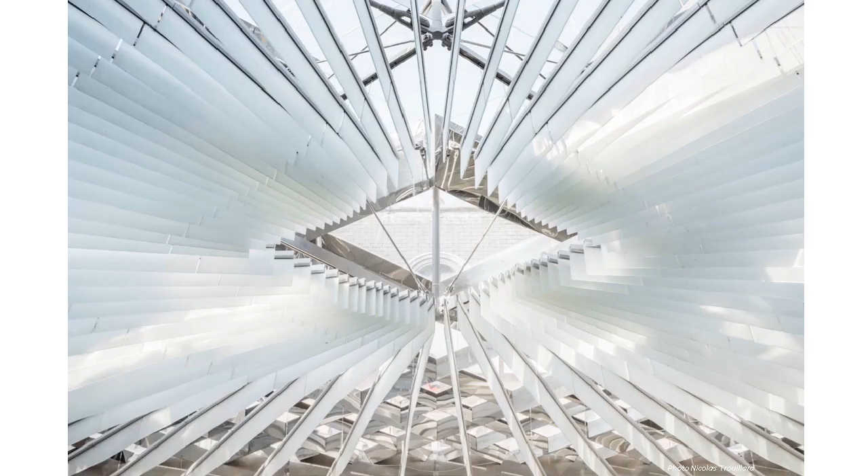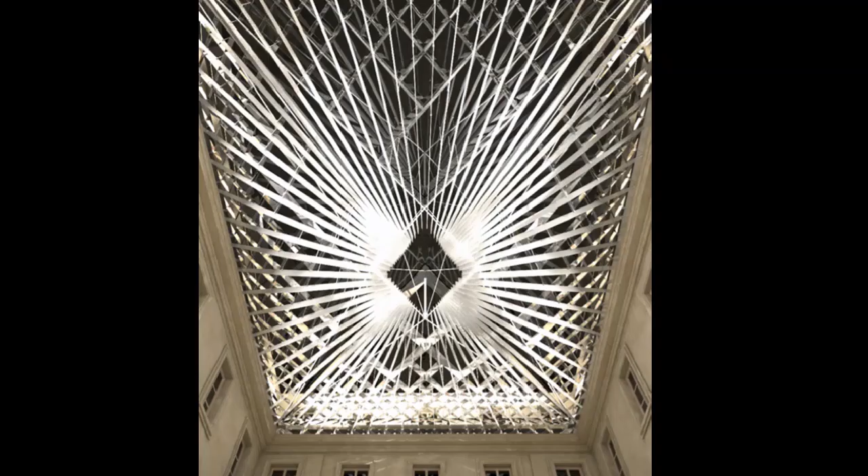This picture was taken on the 15th of January, and you can see sparkling daylight on the floor of the entrance hall. And then some other views of how the light bounces around in this reflective frosted glass, which was consciously done to break out the hard kaleidoscope effect that mirrors would give. So it's a mixture of the mirror and these translucent blades beneath, and then what we hope to see for the lighting at night.

This is a time-lapse picture that Michel Denancé took to show how the light bounces around and reflects. You can see the reflectivity, and you can see the way the crane moves above. That shows the light effect on how we've animated the courtyard with the light.

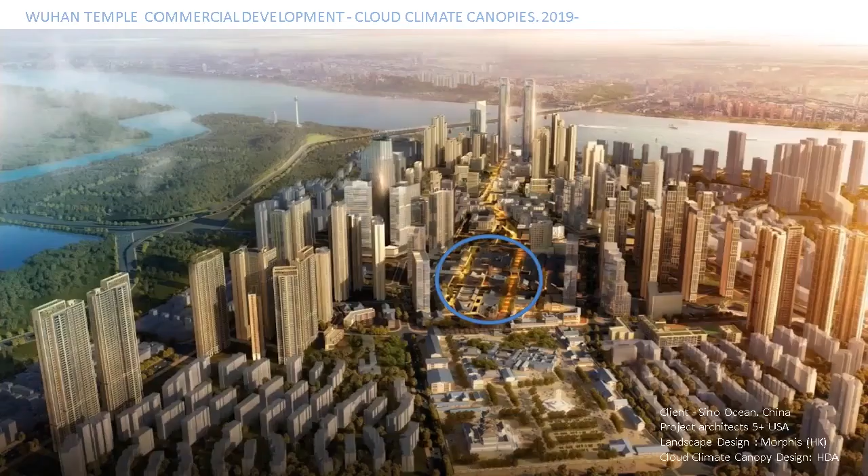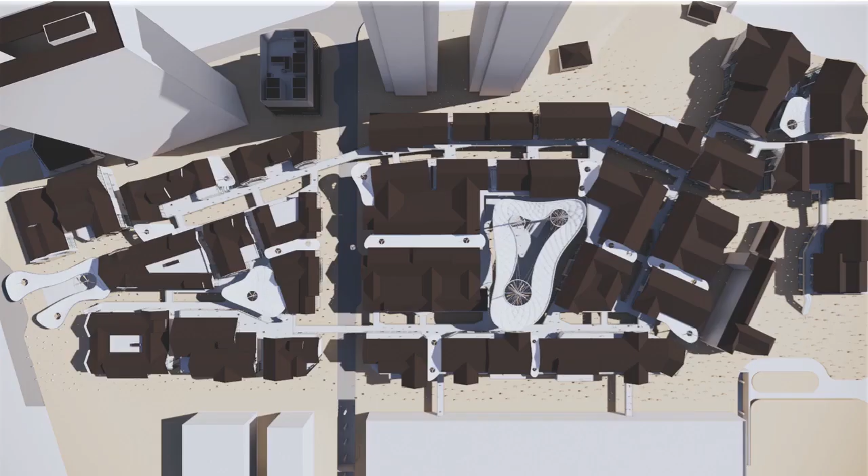So a very last quick one. This is in Wuhan, in China, where the pandemic began. We have the good fortune of working with Sino-Ocean, a developer, building this commercial development in the heart of the city next to an old temple. These people are keeping me very busy these days. The city is looking forward, they want to put this horror story behind them, and so for me it's about looking at nature and being optimistic about the future.

I'll go quickly through this because it's already late. We've been asked to do a series of cloud structures, very similar to Miami, in this development. It's right next to the temple in the old heart of Wuhan, which is a massive city — it's where iron was first worked in China, a very, very long history.

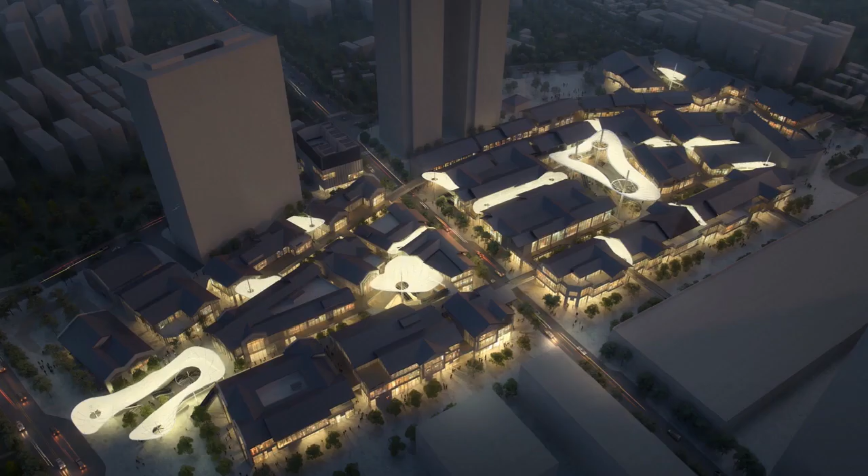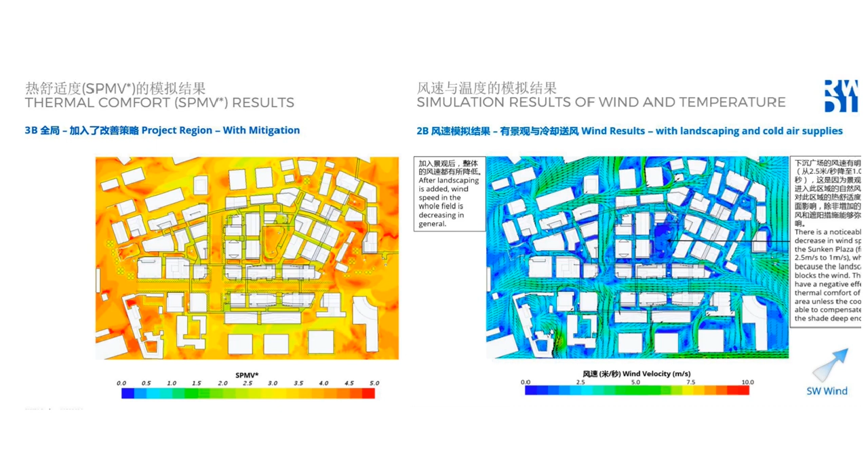So the idea was to grab the breeze, just like in Miami, and to create natural air flow in the streets. Again, we worked with RWDI, and these canopies, like in Miami, become sculptures — iconic pieces that give an identity and particularity to the place, but also tell the story about sustainable design. These are RWDI's initial studies showing how the place can get intolerably hot in summer — on the left, the red shows where it's intolerably hot, and on the right are the breezes. The breezes in Wuhan were from the southwest in summer.

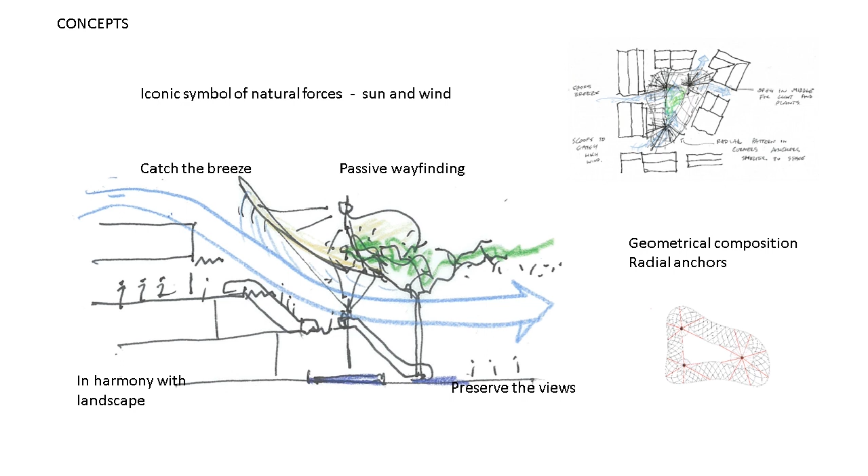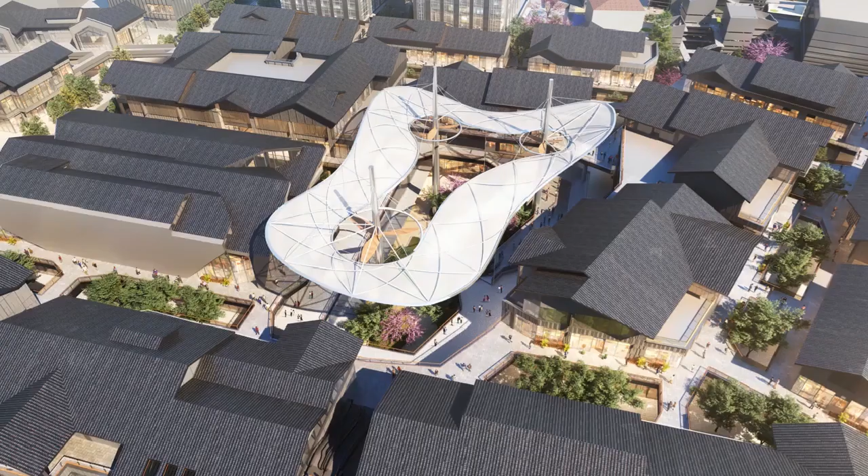So we want to grab those breezes, and we decided to make the canopies into these giant scoops that go up and grab the high-level breeze and bring it down, to give a feeling of air movement. Because even if it's very hot, just the feeling of movement on your skin gives a sense of well-being and comfort.

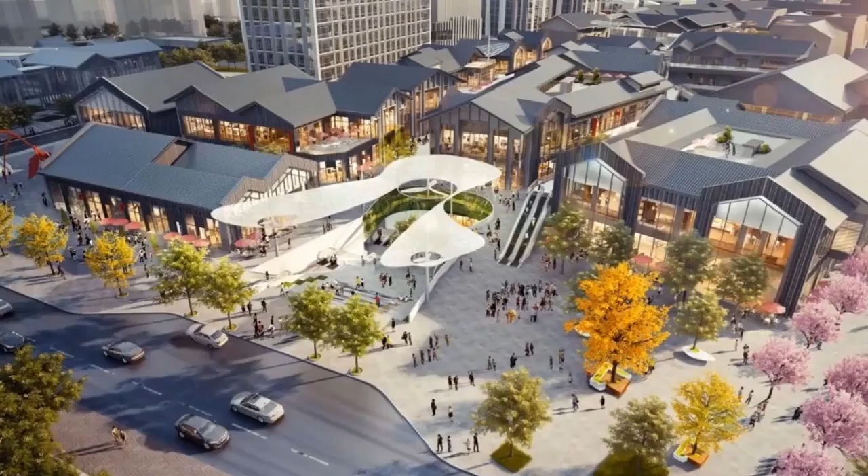So here are some images of the structures we've designed that are now being built — they're in the prototype stage. I'm using PTFE fabric stretched onto steel structures, and we're introducing fans because they help move the air, but they're also visually and symbolically important — showing that we're doing something, that we're helping to move the air.

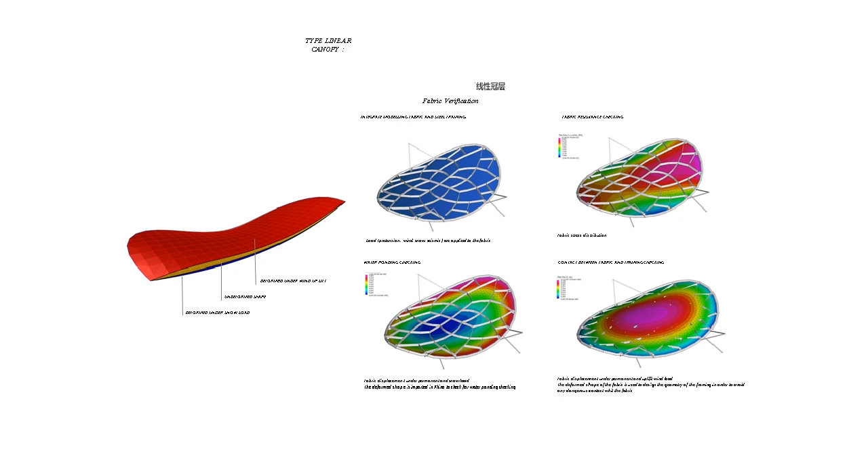I'll flick through these quickly. These are the studies we've done of catching the rainwater, doing form-finding to get the right shape for the fabric, and then we put the steel ring that supports the fabric at a slightly different plane above the fabric plane, to make sure they don't touch each other but still stretch it.

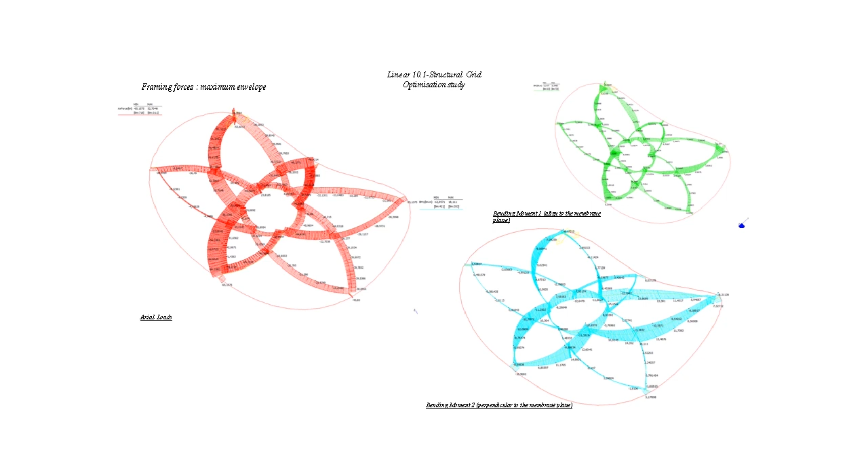We're designing the structure, looking at where the supports are, to have primary petals and secondary petals — so the structure becomes a sculptural design element, but one that also has functional structural performance. The primary petals are slightly more loaded than the secondary ones, which help the ring beam, and together it becomes a pattern, a drawing, giving a specific identity to the design.

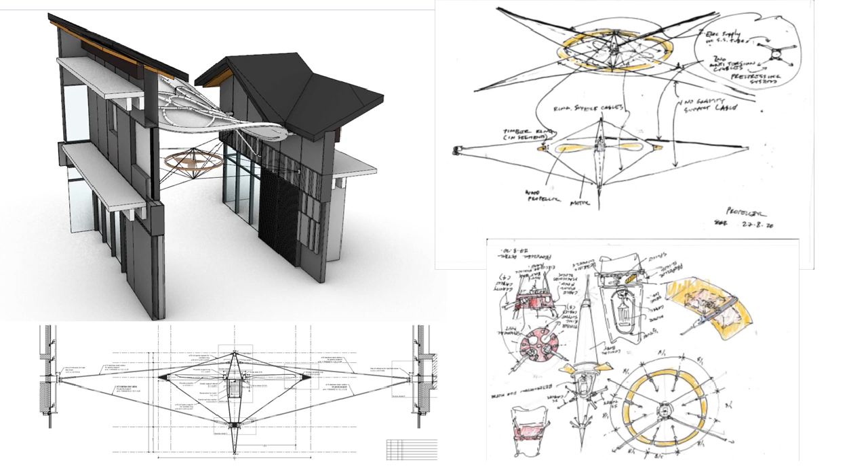Some projects that explore engineering, architecture, and trying to learn from nature and do what we can to make the world a better place by looking at nature. So thank you very much. I hope I haven't been too long and that there's some time for questions.

Thank you very much indeed, Hugh. Fascinating to see what you've been doing, and as a continuation of Peter Rice's work as both a holistic designer, but also very much integrating architecture and engineering with the climate and nature.

Absolutely fascinating. I've got a quick question. Where do you now see your work taking you, particularly considering the climate emergency? I'm thinking now because you've been involved essentially on specific elements within projects. Do you see yourself now going for total architecture engineering within a project brief?